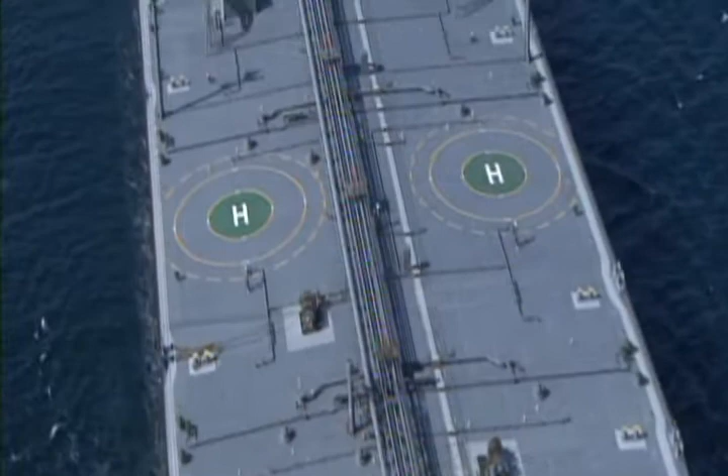Especially for a large ship, it is customary to have a pilot guided into and out of a port. But to ensure the ship's safe navigation at port, the ship's captain must visualize in advance how to steer the ship and be ready to compare it with the pilot's performance in his mind's eye.

For safe navigation, the officer at the helm needs to have a clear understanding of external forces and surrounding conditions in order to berth and unberth the ship through cooperation with the tugboat operator. This requires the steering officer to be familiar with the performance, characteristics, and operation of tugboats.

This DVD is intended for captains and deck officers whose duties include maneuvering of a ship, to better understand not only the performance characteristics of tugboats, but also the correct use as an indispensable aid in berthing or unberthing of vessels.

Tugboats are classified by their usage. Harbor tugs are intended to assist a large ship to enter and exit the port. Towing tugs tow work vessels and other non-self-propelled ships, and salvage tugs relieve ships in distress. This DVD focuses on harbor tugs.

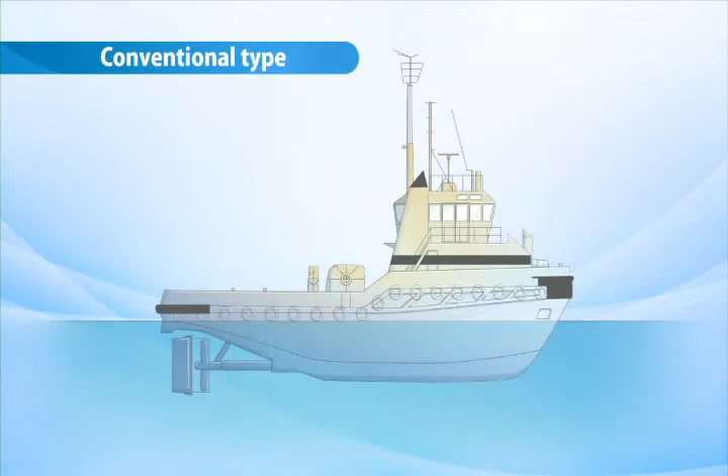The propeller of a tugboat differs in type with its position of installation. A tugboat with its propeller toward the stern, like an ordinary merchant ship, has a number of different propellers available, including the conventional type propeller and a flap type rudder, a combined type with a conventional propeller and an added bow thruster, an azimuth stern drive (ASD type) using a Kort nozzle type propeller with no rudder, and a pump jet type.

On the other hand, a tugboat whose propeller is installed toward the bow is known as a tractor tug, which usually has a Voith-Schneider propeller or an azimuth propeller.

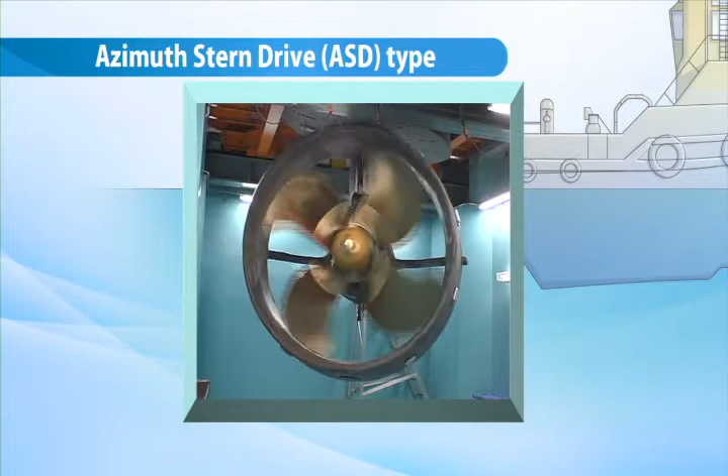The ASD-type propeller consists of a screw propeller and a surrounding Kort nozzle, which enables the propeller to be turned in a full 360-degree range. Its distinct advantages from the conventional propeller include the ability to generate a strong thrust in any direction, forward, astern, left or right, and reducing the tugboat's overall length.

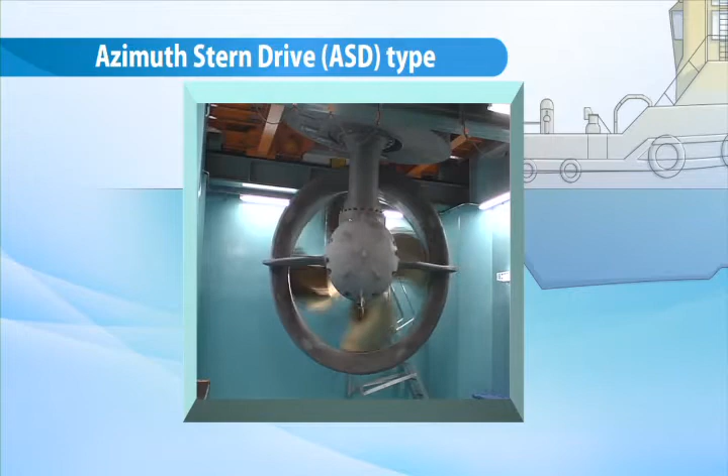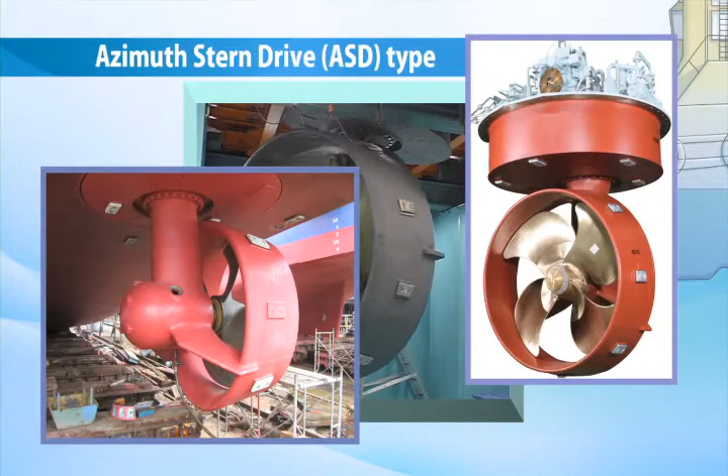The ASD type are manufactured under different names, such as Duckpeller, Z-peller, or Rex-peller, but they do not significantly differ in working principle. In Japan, the ASD type propellers constitute the mainstream.

The pump jet type propulsion system has a pump fitted to the hull bottom that spurts out seawater obliquely downward as a force to drive the boat ahead. By varying the spurt direction, the boat can be propelled in any direction in a 360-degree range.

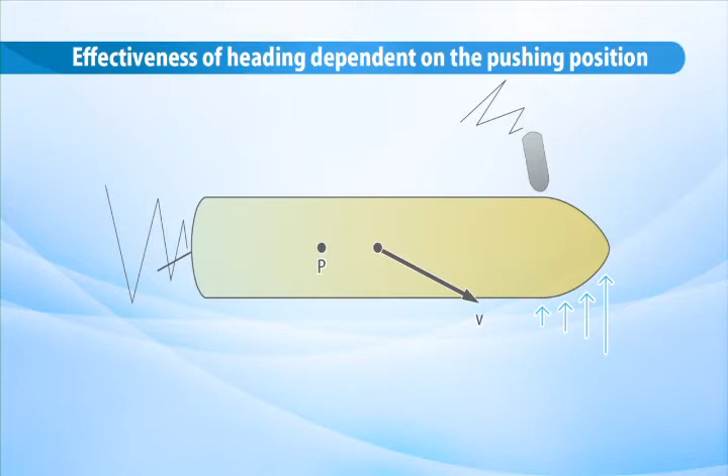Hull movements can be considered in 2 separate aspects: force and turning moment. The following focuses on wind-induced hull movements. First, let us suppose that the wind is blowing in the direction of 45 degrees on the starboard of your ship. Wind pressure works on the ship's center of wind pressure.

The wind pressures can be broken down into 3 elements, including the wind pressure in the longitudinal direction, wind pressure in the transverse direction, and wind pressure moment.

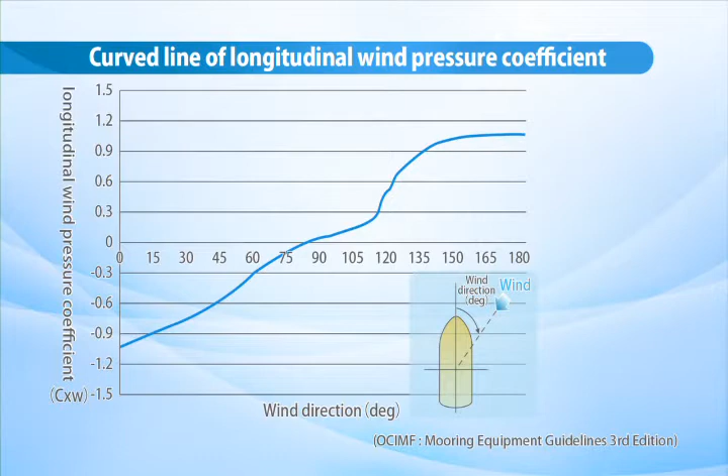On a graph of the longitudinal wind pressure coefficient, in which the horizontal axis represents the wind direction and the vertical axis represents the coefficient, it is negative at 45 degrees of wind direction. This means moving back. On a graph of the transverse wind pressure coefficient, it is negative at 45 degrees of wind direction. This means being driven in the port direction.

On a graph of the wind pressure moment, in which the horizontal axis represents the wind direction and the vertical axis represents the coefficient, it is positive at 45 degrees of wind direction. This means the generation of a clockwise moment. Overall, the ship turns clockwise while being driven obliquely port astern.

Next, let us suppose that the wind is blowing in the direction of 90 degrees on the starboard of your ship, with the wind pressures in the longitudinal and transverse directions, and wind pressure moment same as before. A graph of the longitudinal wind pressure coefficient shows a slight positive value at 90 degrees of wind direction. This means slightly moving ahead.

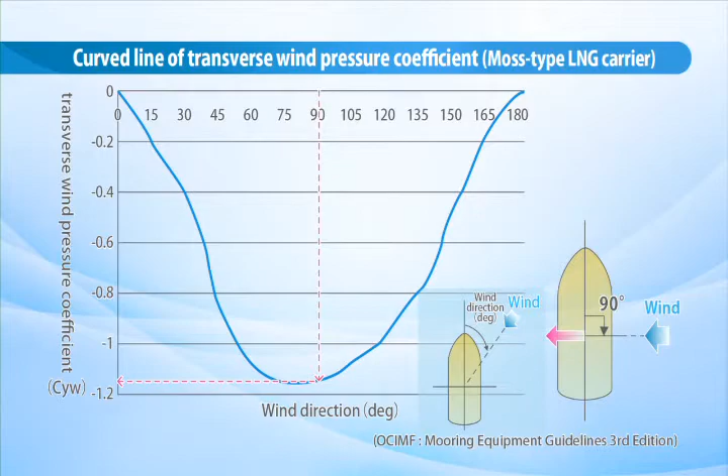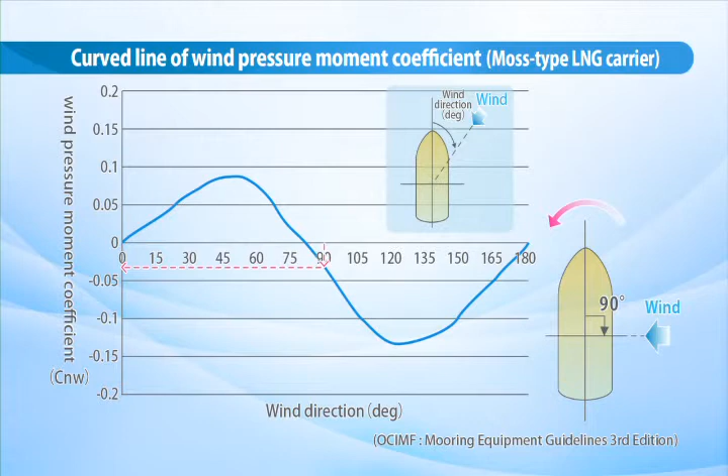A graph of the transverse wind pressure coefficient shows a negative value at 90 degrees of wind direction. This means being driven in the port direction. A graph of the wind pressure moment shows a negative value at 90 degrees of wind direction. This means the generation of a counterclockwise moment. Overall, the ship turns counterclockwise while being driven obliquely port ahead.

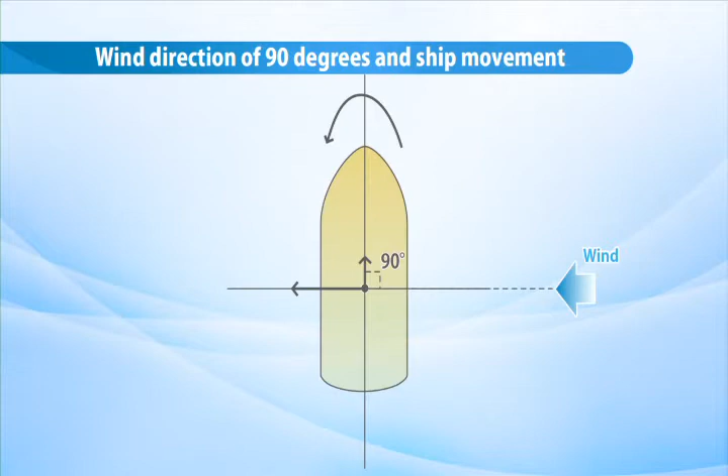Now let us suppose that a Moss-type LNG carrier, 300 meters between perpendiculars, at halt is to be pressed sideways by four 4,000 horsepower tugboats. What will be the dynamic motions at work?

For an ASD-type tugboat, the bollard pull is calculated to be 1.5 tons per 100 horsepower, which at 4,000 horsepower equals 60 tons. If 80% of this 60 tons can be used as thrust, the full thrust per boat will be roughly 48 tons.

In a first case, let us suppose that a wind of 12 meters per second is blowing at the ship head-on, namely a relative wind direction of 0 degrees.

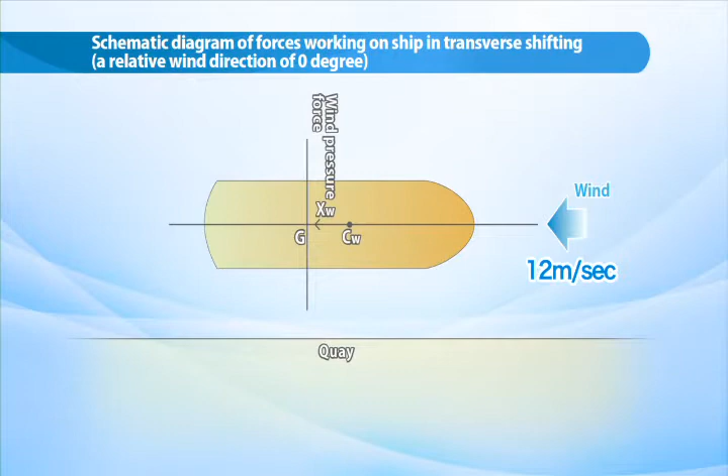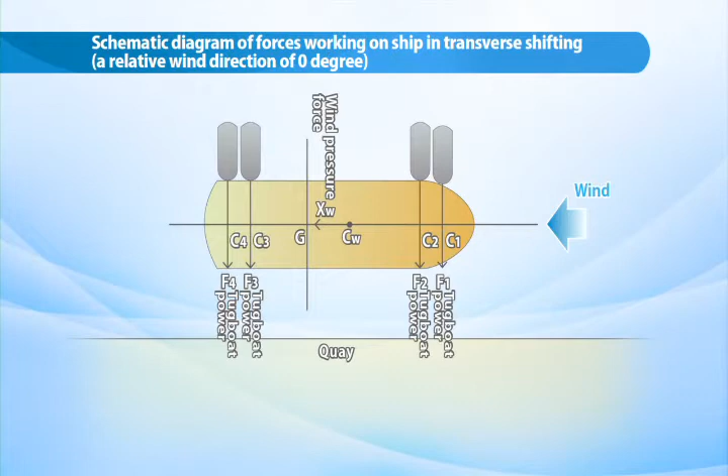Regarding the ship's movement, both the wind pressure force and the pushing force of the tugboats should be taken into account. Usually, when the wind blows head-on, the wind force only works astern, but neither a transverse force nor a turning moment is generated.

The magnitude of the wind pressure force differs with the ship's shape and area exposed to wind. Here, supposing the longitudinal wind pressure coefficient is minus 1.02 and the area of exposure to headwinds is 2,000 square meters, the longitudinal wind pressure is calculated to be about 18 tons.

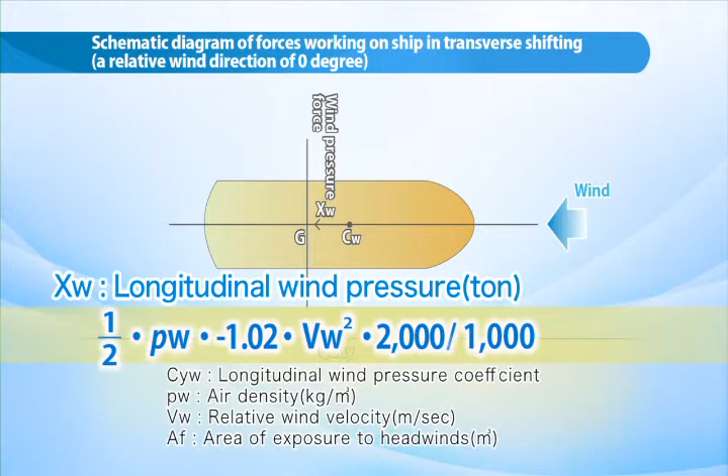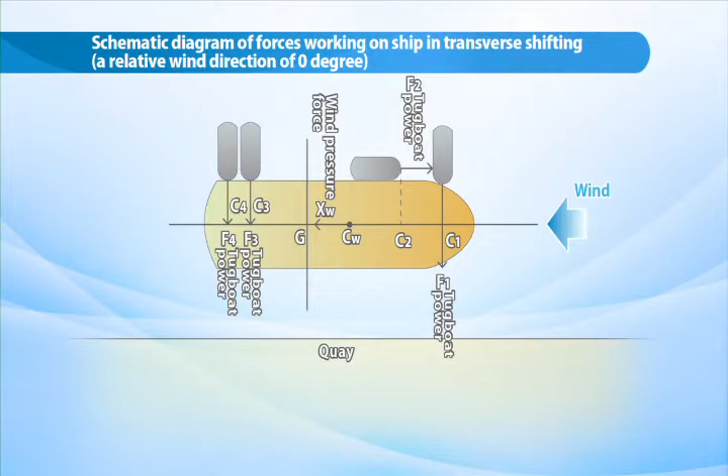In order to move the ship exactly sideways from the start point of pushing, the tugboat's thrust should cancel the wind pressure force. The wind pressure force in the longitudinal direction is canceled by placing one of the tugboats for alongside towing or towing on a line at the bow, and having it run at slow speed ahead in the 12 o'clock direction. The ship can then be shifted transversely while adjusting the thrusts of the other tugboats.

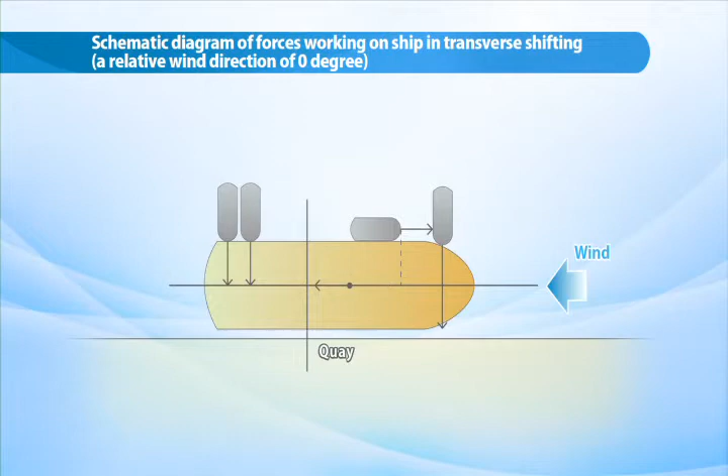In a second case, suppose the wind is blowing directly sideways against starboard at 12 meters per second in a relative direction of 90 degrees.

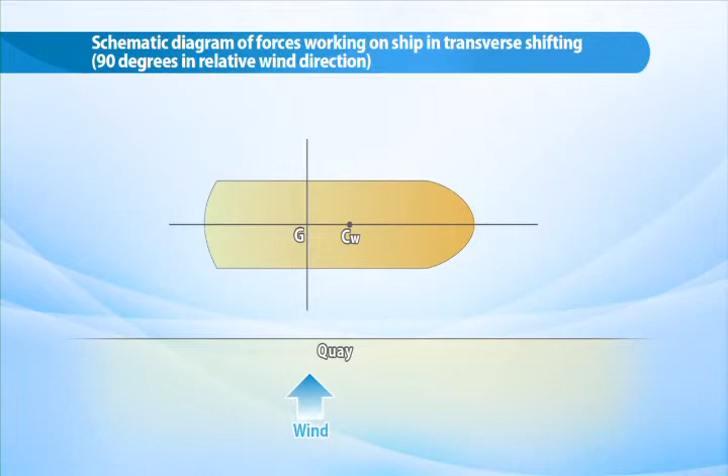Same as before, both the wind pressure force and the pushing forces of the tugboats should be taken into consideration. Usually, when the wind blows directly sideways, there are forces working ahead and transversely, causing a counterclockwise moment.

Here, let us suppose that the longitudinal wind pressure coefficient is minus 0.02, the transverse wind pressure coefficient is minus 1.16, the wind pressure moment coefficient is minus 0.028, the area of exposure to headwinds is 2,000 square meters, and the area of exposure to sideway winds is 9,000 square meters.

That would mean the forces working on the ship include a wind pressure in the longitudinal direction of about 0.4 ton on the bow, a wind pressure in the transverse direction of about 93 tons on the port side, and a turning moment of about 675 ton-meters counterclockwise.

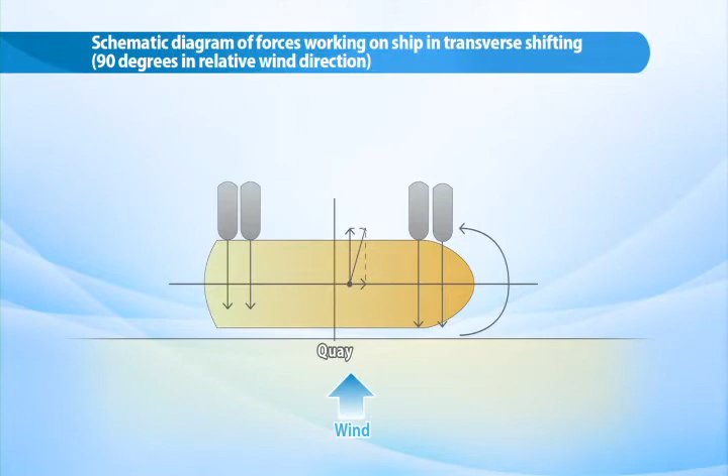In order for the ship to shift from the start point of pushing in the exact transverse direction, the thrust of the tugboats should cancel the wind pressure force in the longitudinal direction and the turning moment. Furthermore, the pushing should be accomplished with a greater thrust than the wind pressure force in the transverse direction.

It should be noted, however, that the wind pressure force in the longitudinal direction in this example is only 0.4 ton, which is too small for serious consideration.

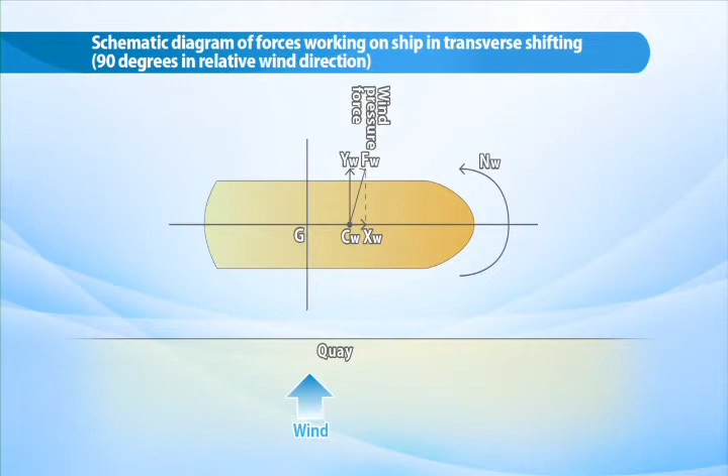On the other hand, in order to cancel the turning moment, it is necessary for the tugboats toward the bow to have a greater thrust than the tugboats astern.

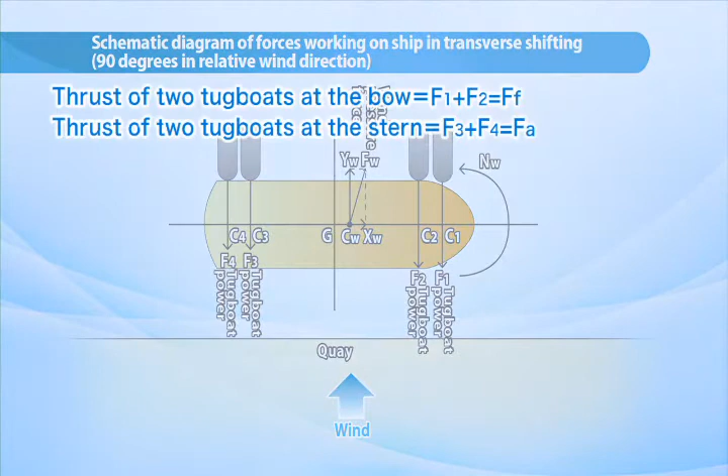For instance, if two tugboats each are to push the ship in the full 3 o'clock direction, head-on, 100 meters ahead of and 100 meters behind the center of gravity respectively, the combined thrust of the tugboats ahead should be about 7 tons greater than that of the tugboats astern.

The combined thrust of the 4 tugboats in this case is about 192 tons, greater than the approximately 93 tons of the transverse wind pressure, and therefore transverse shifting is possible.

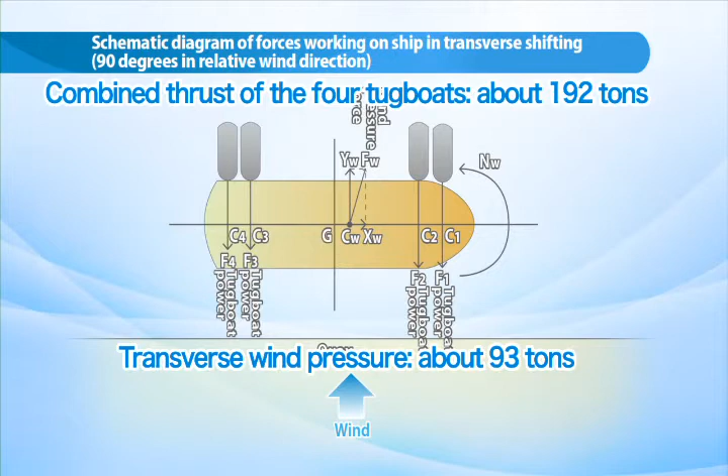Usually, when the ship is to be shifted transversely, an imbalance between the force of the tugboats ahead of the center of gravity and that of the tugboats behind would invite a turning moment, and accordingly, the power outputs of the tugboats should be adjusted appropriately.

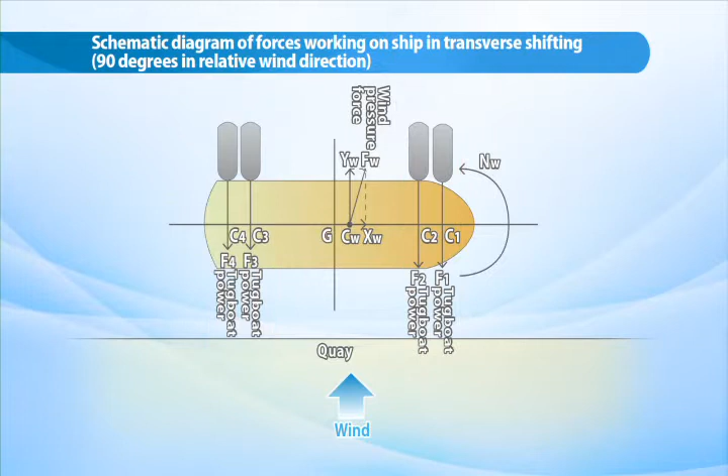Regarding the turning of the supported ship, both the wind pressure force and the pushing forces of the tugboats should be considered as in the case of transverse shifting. Yet, unlike in transverse shifting, the change in relative wind direction with the ship's turning also deserves attention.

If there is no other external force at work, the angular speed of turning is smaller in the early phase of turning and increases as turning progresses. Therefore, the ship is exposed to winds in the same direction for a long period of time in the early phase of turning.

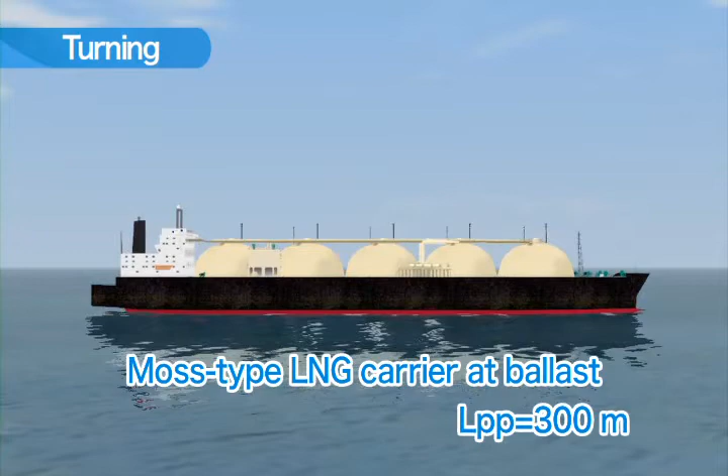Let us suppose that a Moss-type LNG carrier at halt in ballast is to be turned 180 degrees starboard by 4 4,000 horsepower tugboats. The vessel measures 2,000 square meters in area of exposure to headwinds, 9,000 square meters in area of exposure to sideway winds, and 300 meters in length between perpendiculars.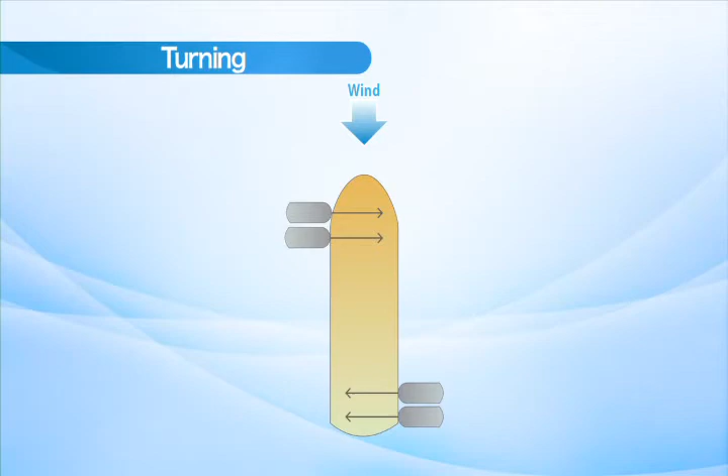Shown here is a case in which the ship is turned 180 degrees by having 2 of the tugboats push the port side of its bow in the 3 o'clock direction, and the other 2 push the starboard side of the stern in the 9 o'clock direction, both at full power.

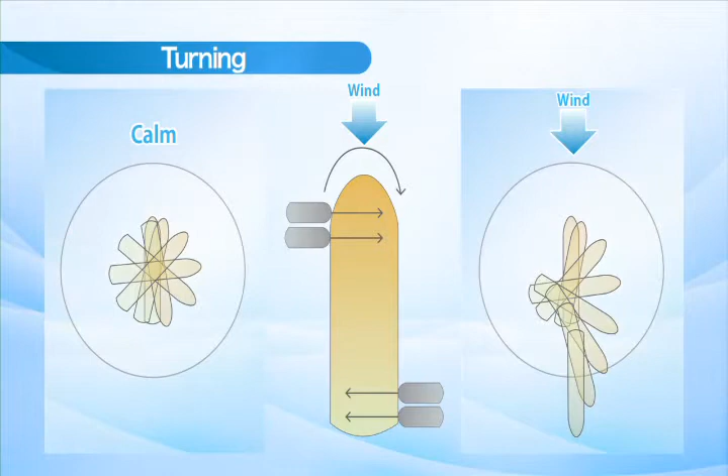The diagram to the left shows variations in wake when there is no wind, and to the right, wake variations when there is some wind. You can see that when there is no wind, there is substantially no shift ahead, astern, port, or starboard, and the turning takes place where the turn started.

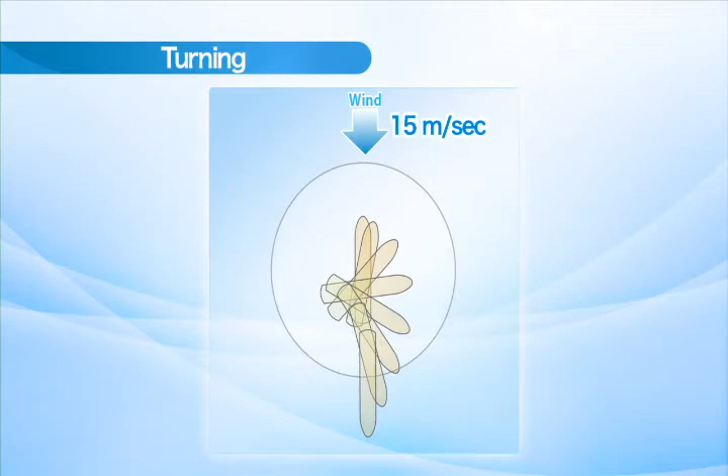Next, when there is some wind, say 15 meters per second, directly at the bow, or at 0 degree in relative wind direction, the ship's position after the turn is behind where it was before making the turn because it has been driven astern. To adjust the turning position using only tugboats, a thrust against the wind would be needed.

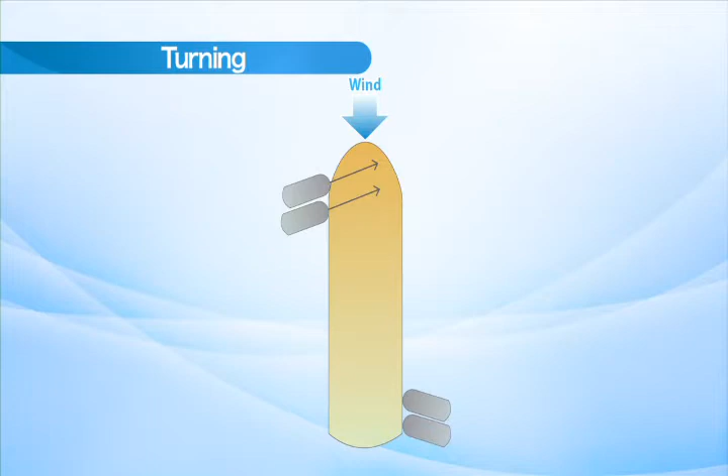One way to achieve this is to have the tugboats ahead push in the 2 o'clock direction, and those astern push in the 10 o'clock direction, and maneuver the ship as if to have them push in the 3 and 9 o'clock positions respectively, with an increase in the turning angular speed.

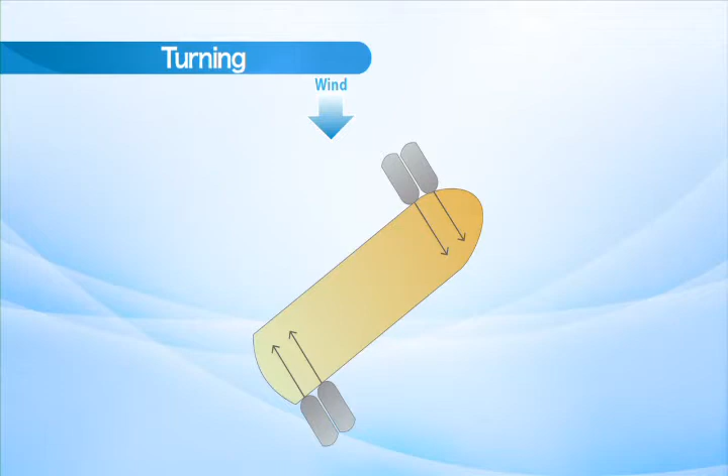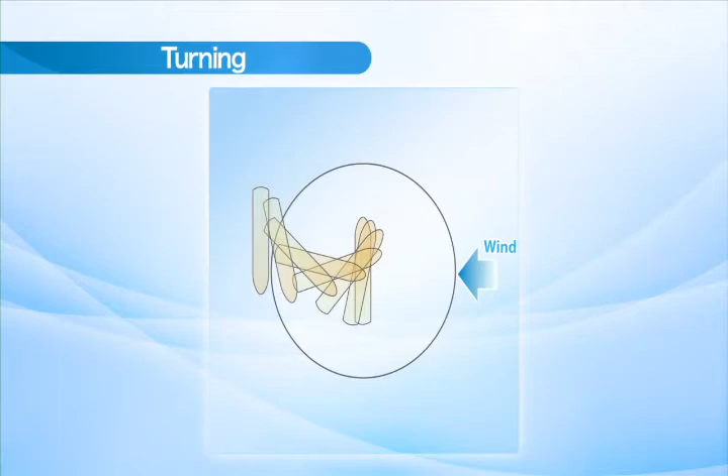You will see that the ship's position after the turn is farther on the port side than before, as the wind has driven the hull in that direction. Adjusting the turning position using only tugboats would require a thrust in the starboard direction.

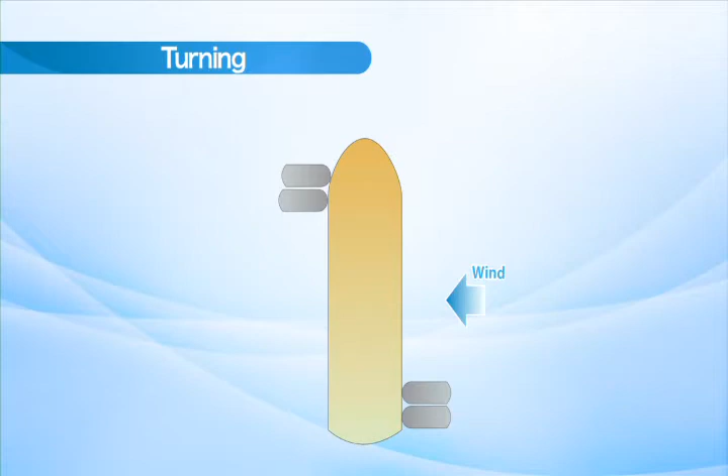In the early phase of turning, the stern would be pushed in the same direction as the wind, but the bow would have to be pushed against the wind. In one example of spinning, 2 tugboats at the bow are used at full speed, and the other 2 at the stern at slow speed.

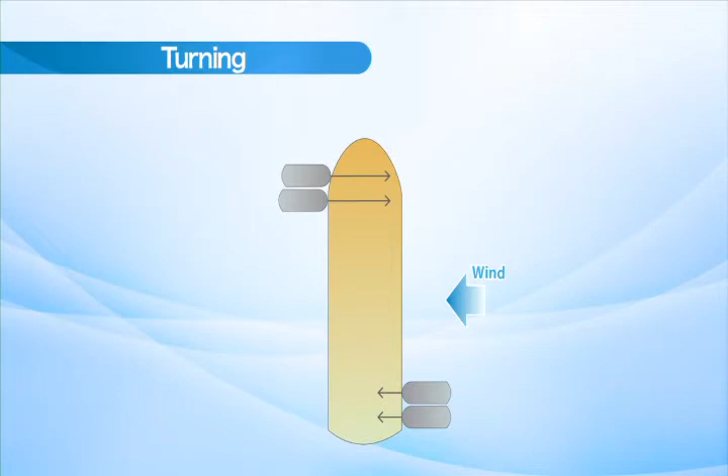Therefore, it is imperative to take into account topographical features of the surroundings as well as environmental conditions, and deploy the tugboats appropriately for these external factors.

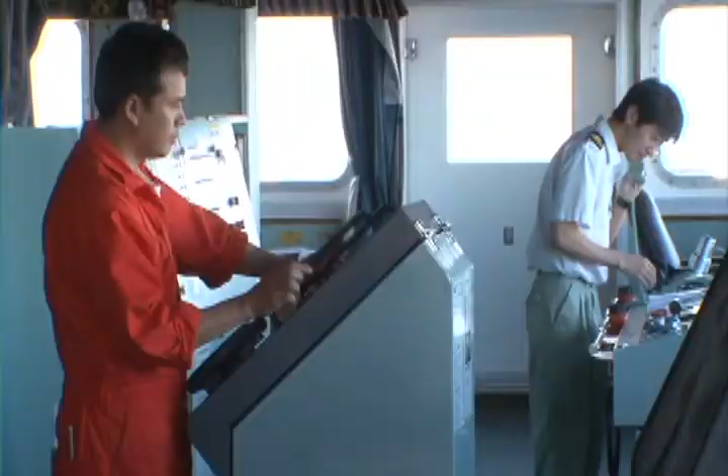When the ship nears the port of call, the captain considers the port situation and the day's weather and decides how many tugboats will be needed. If the local association of pilots and/or the berth have their own tugboat requirements, the captain will also take these into account. If the ship has visited the port in the past, there should be no problem.

But if it's its first call at the port, sufficient information to make a decision may not be available, and the captain will have to make a difficult choice. In view of this problem, this DVD will introduce the concept of tugboat power allowance.

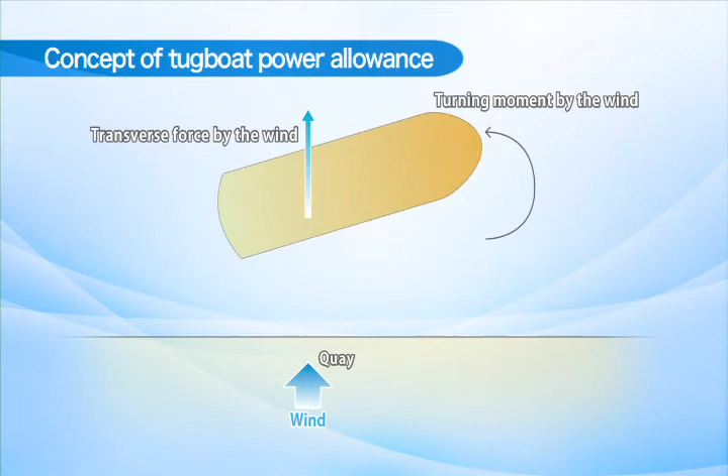When the ship is to be berthed against offshore wind, pushing the ship by tugboats sideways involves two types of relevant forces: one to control turning by the wind, and the other purely required for transverse shifting. The force available for transverse shifting can be considered the balance of subtracting the force to control turning by the wind from the combined thrust of all the tugboats.

The Tugboat Power Allowance indicates how much greater the force of tugboats available for transverse shifting is than the wind pressure force. It varies with the ship's load condition, the power output, number, and arranged position of the tugboats, and the wind direction and velocity.

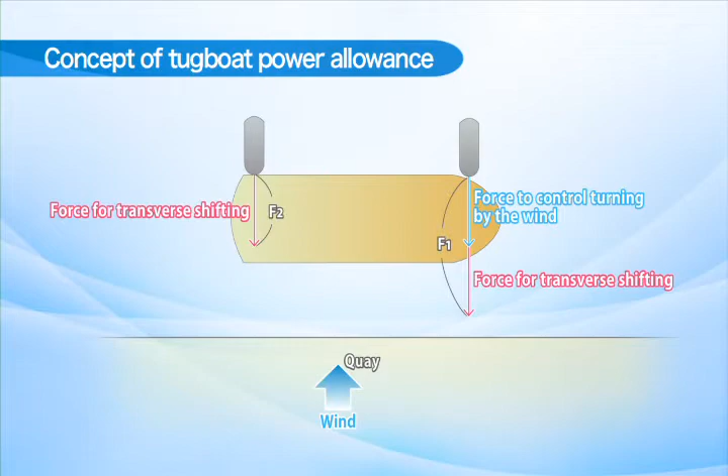In reality, the arranged positions of tugboats to push or pull the ship at its bow and stern are substantially unchanged. Therefore, if you prepare a graph in advance for each of the relevant factors, including the ship's loaded condition, the thrust and number of the tugboats, and the wind direction and velocity, you can keep reference drawings available to always use aboard the ship.

Now let us look at the steps in preparing the graph. For our example, one tugboat each is assigned to the bow and stern to help the ship berth against offshore wind.

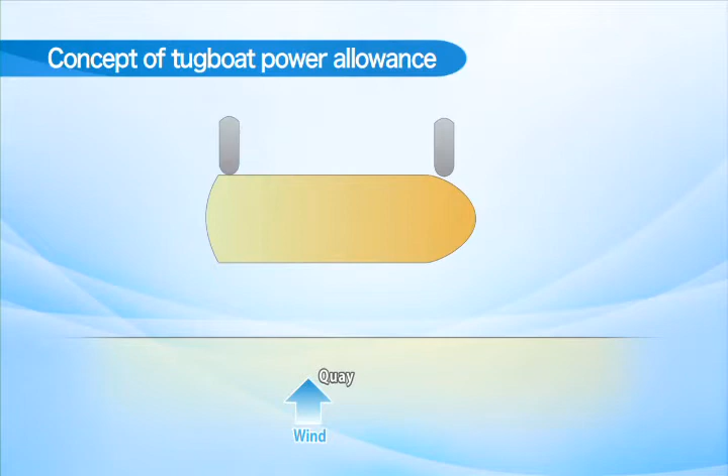1. Obtain data on the ship's wind pressure coefficient and area of exposure to sideway winds. 2. Calculate the turning moment and the transverse wind pressure force. Calculation formulas will be provided at the end for your supplementary reference.

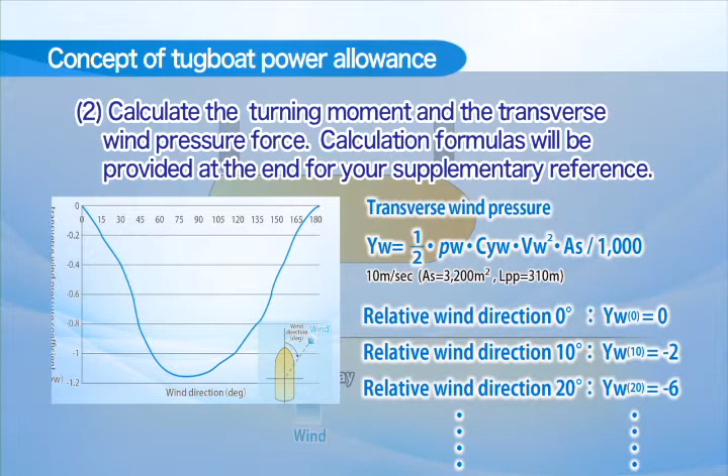Check with blueprints, including the general arrangement, to find out the distances from the center of gravity to the supposed working points of the tugboats.

Check the power output and bollard pull of each tugboat. If no such information is available, make them 100 horsepower and 1.5 tons respectively. Accounting for the influence of waves, use 80% towing power for your calculation.

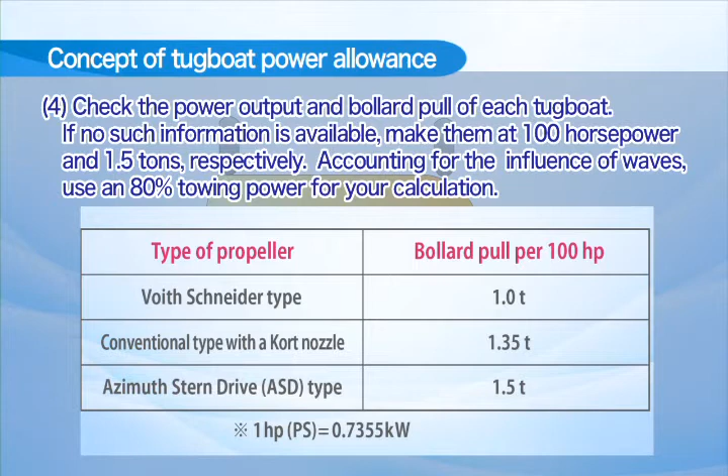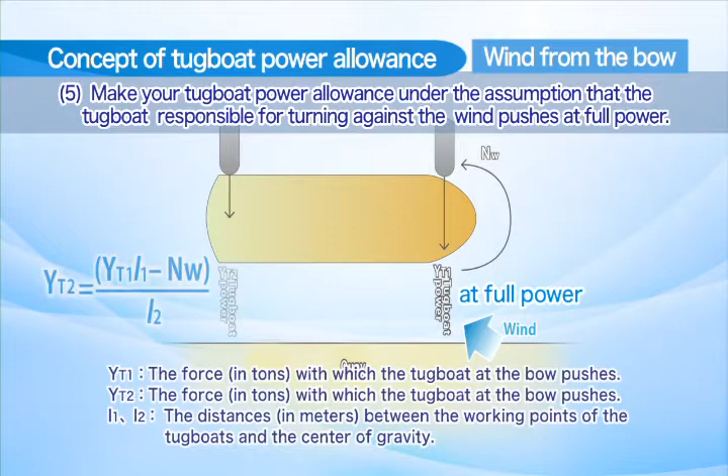Make your tugboat power allowance under the assumption that the tugboat responsible for turning against the wind pushes at full power. Or, when the tugboat at the bow cancels the wind pressure moment, the relationship between the force YT1, with which this tugboat pushes at full power, and the force YT2, with which the tugboat at the stern pushes for transverse shifting in parallel, is YT2 equals YT1 times L1 minus NW divided by L2.

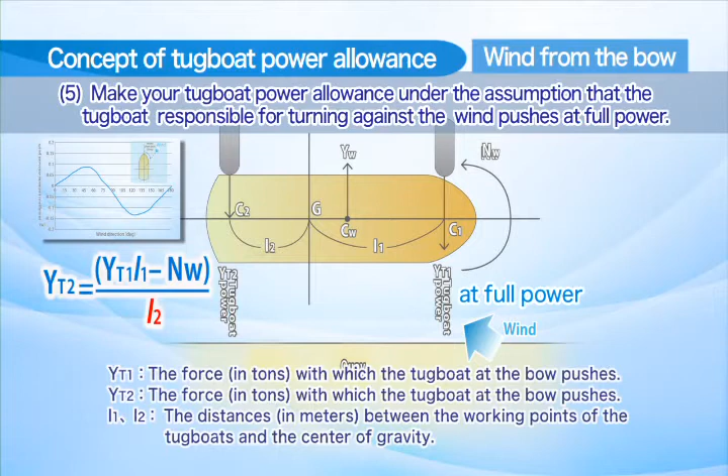The force available for use in transverse shifting is represented by Y F/T equals YT1 plus YT2. By dividing the force available for use in transverse shifting by the exact sideway wind pressure force, the tugboat power allowance can be calculated: Tm equals Y F/T divided by YW.

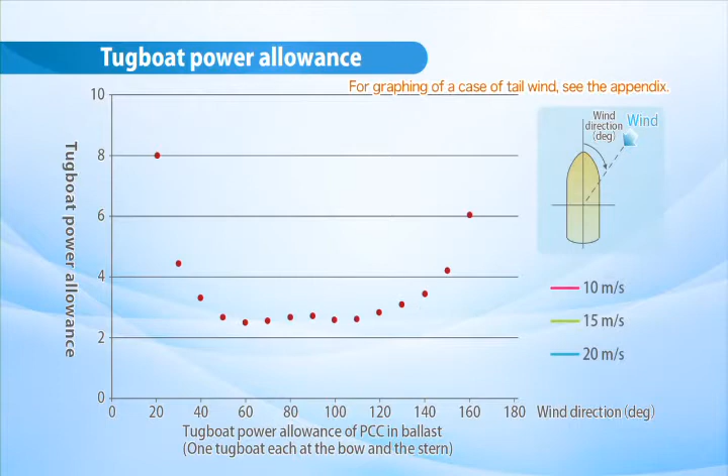As the tugboat power allowance can be calculated in this way, if you calculate the allowances at intervals such as every 10 degrees of relative wind direction and every 5 meters per second of wind velocity, and make a graph with the data, you can readily determine the minimum number of tugboats needed under given conditions.

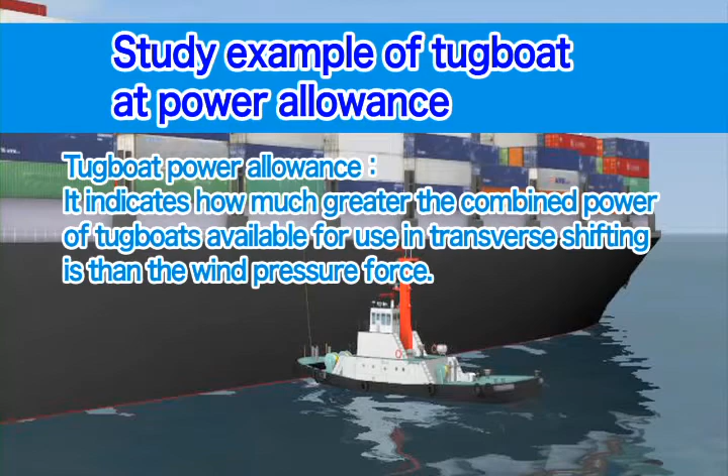The tugboat power allowance indicates how much greater the combined power of tugboats available for use in transverse shifting is than the wind pressure force.

However, experience tells us that the recommended tugboat power allowance should be 3 to 4.

For a basic maneuvering pattern using tugboats, there is no significant difference between large and small ships. If requirements in the number of tugboats and their total power output are adequate, safe maneuvering can be accomplished.

It is essential to keep in mind that external forces always vary, and therefore to secure more than enough tugboats to ensure safe maneuvering.

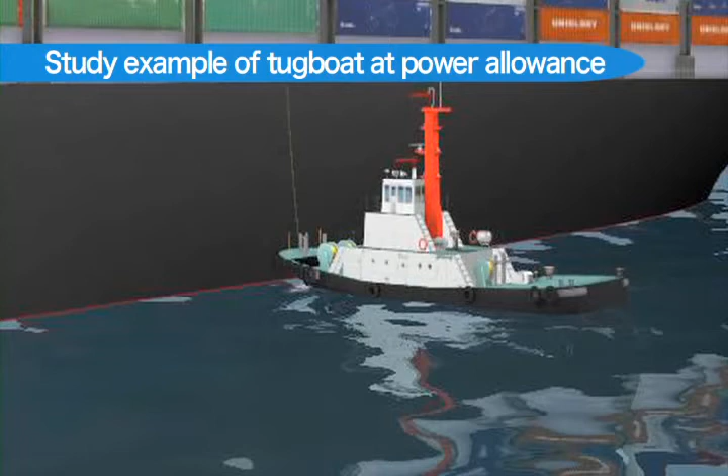Let's consider a fully loaded VLCC, for example. It is 310 meters long between perpendiculars and has a 1,100 square meter area of exposure to headwinds, and a 3,200 square meter area of exposure to sideway winds.

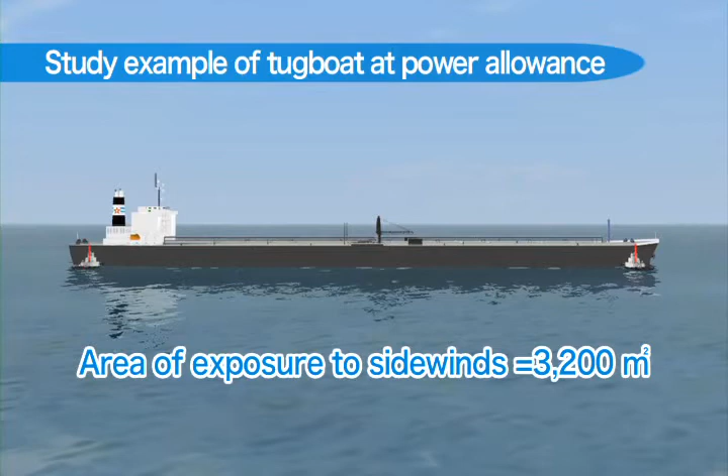The distance between the tugboat and the ship's hull center, both on the bow side and on the stern side, is 150 meters, while the tugboat's bollard pull is 48 tons.

In the graph, the horizontal axis represents the relative wind direction as seen from the bow. The vertical axis represents the tugboat power allowance, indicated by the red line when wind velocity is 10 meters per second, the green line at 15 meters per second, and the blue line at 20 meters per second.

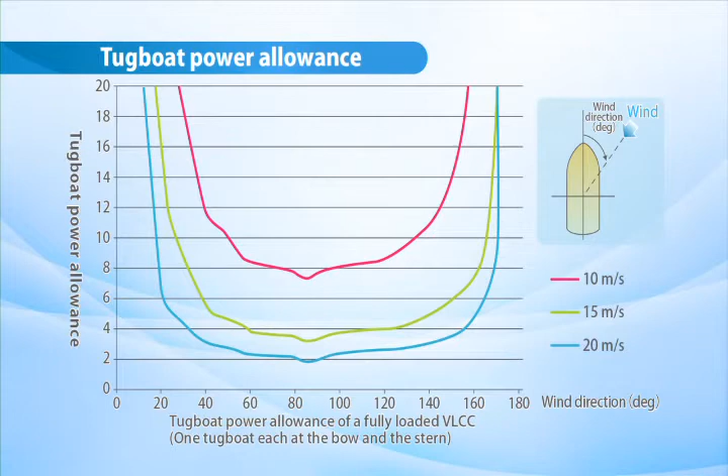To use the graph, with a recommended tugboat power allowance of 4, draw a horizontal line at that number. The number of tugboats indicated in the area above this horizontal line would be sufficient.

For instance, if a 10 meter per second wind is blowing from a relative wind direction of 60 degrees, 2 tugboats would be sufficient because the tugboat power allowance represented by the red line is above this horizontal line.

However, if the wind velocity rises to 15 meters per second with the wind direction unchanged, 2 tugboats would not be enough, because the green line shows an area below the horizontal line.

If there is a shortage of tugboats, successively check the pre-drawn graphs for 3 tugboats and 4 tugboats. If the relative wind direction is 60 degrees and the wind velocity is 15 meters per second, assign 1 tugboat to the bow and 2 to the stern. The tugboat capacity would then be sufficient.

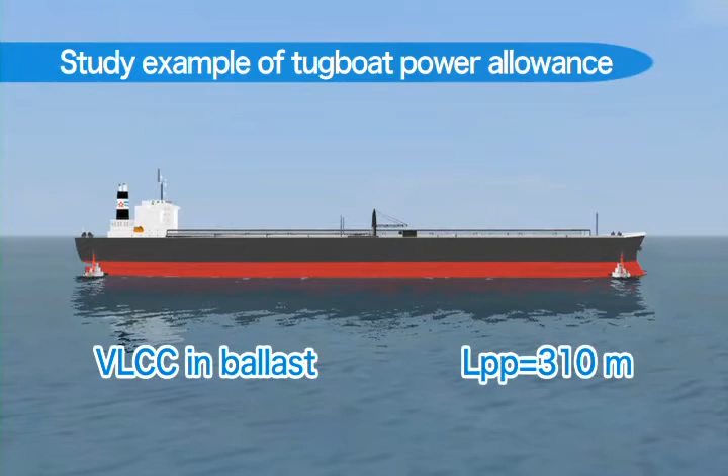Next, let us look at the same VLCC in ballast. It is 310 meters long between perpendiculars and has a 1,800 square meter area of exposure to headwinds, and a 7,100 square meter area of exposure to sideway winds.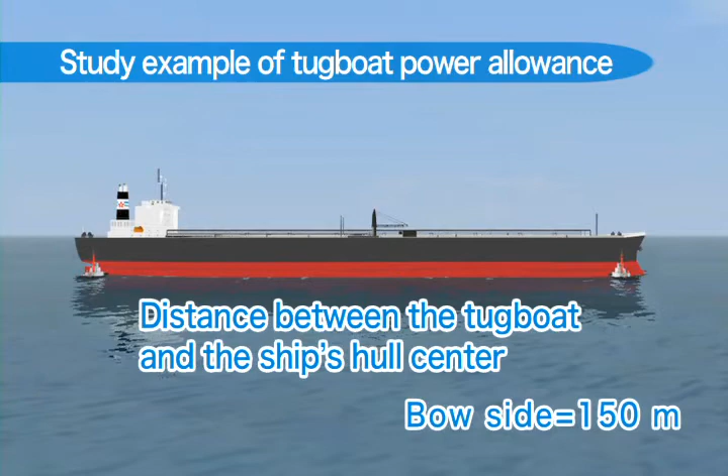The distance between the tugboat and the ship's hull center, both on the bow side and on the stern side, is 150 meters, and the tugboat's bollard pull is 48 tons.

If, for instance, a 10 meter per second wind is blowing in a relative wind direction of 60 degrees, 4 tugboats would be sufficient because the area is above the horizontal line.

However, if the wind velocity rises to 15 meters per second with the wind direction unchanged, there would arise a shortage of tugboats because the green line shows an area below the horizontal line. In this case, for instance, 3 tugboats at the bow and 2 at the stern would be sufficient.

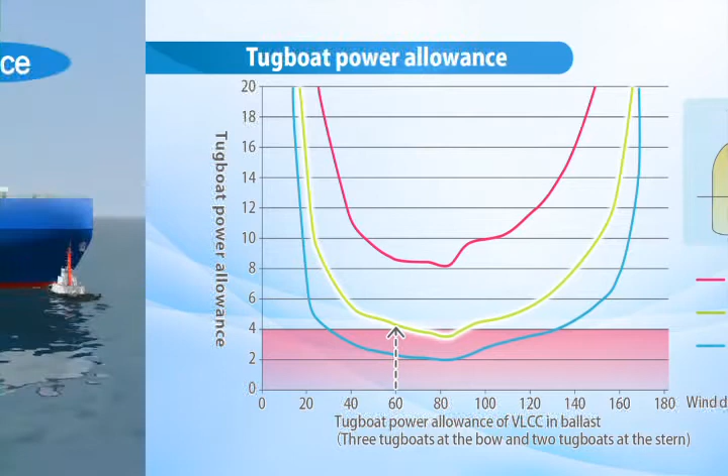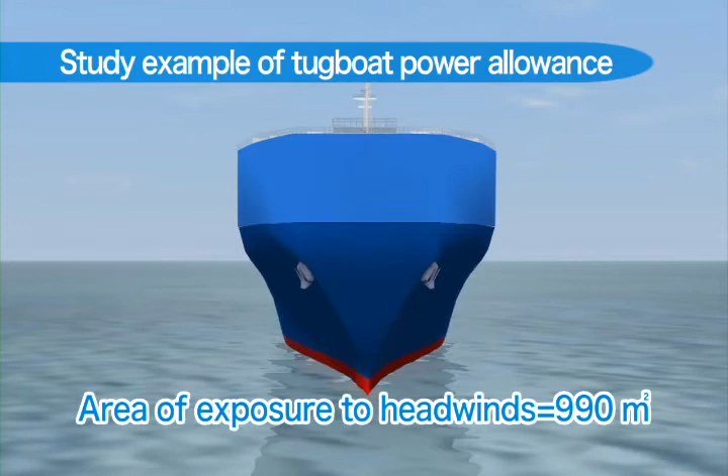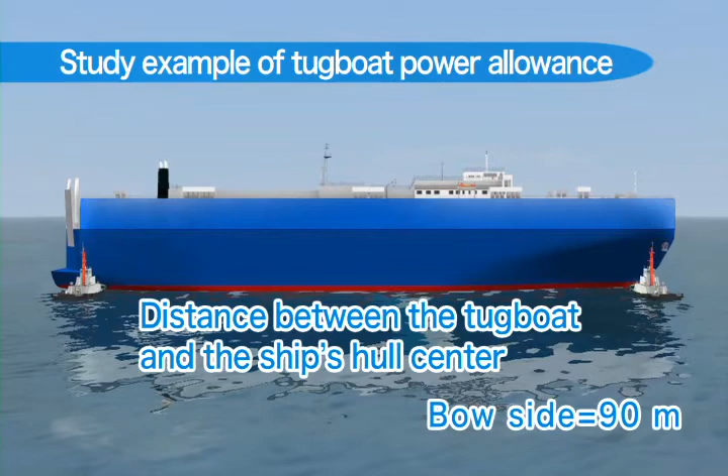Finally, let us look at a PCC in ballast, which has a large area exposed to wind forces. It is 190 meters long between perpendiculars and has a 990 square meter area of exposure to headwinds and a 5,750 square meter area exposure to sideway winds. The distance between the tugboat and the ship's hull center, both on the bow side and stern side, is 90 meters, and the tugboat's bollard pull is 48 tons.

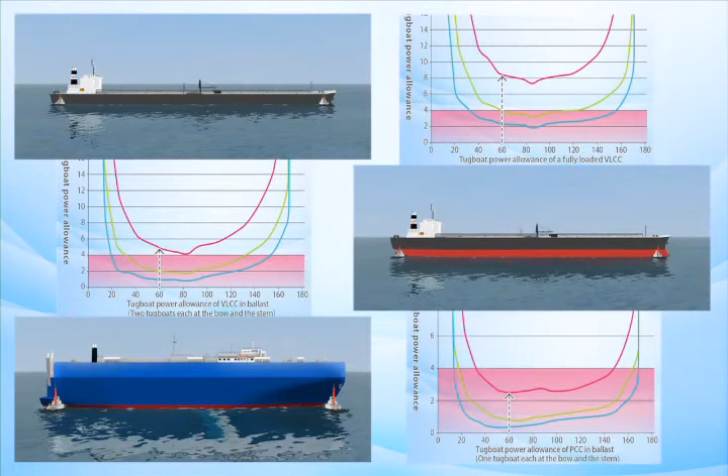For instance, if a 10 meter per second wind is blowing in a relative wind direction of 60 degrees, 2 tugboats would not be sufficient because the tugboat power allowance represented by the red line is below the horizontal line. So far, it has been explained how to use the graph of tugboat power allowance, but it should be noted that the tugboat power allowance does not take into account the influences of tidal currents and shallow water.

The previous section considered the tugboat power allowance only as it pertains to the influence of winds. Now let us look at how it is affected by tidal currents and water depth. When there is a current, the fluid pressure working on the ship increases with the exposed area under the waterline.

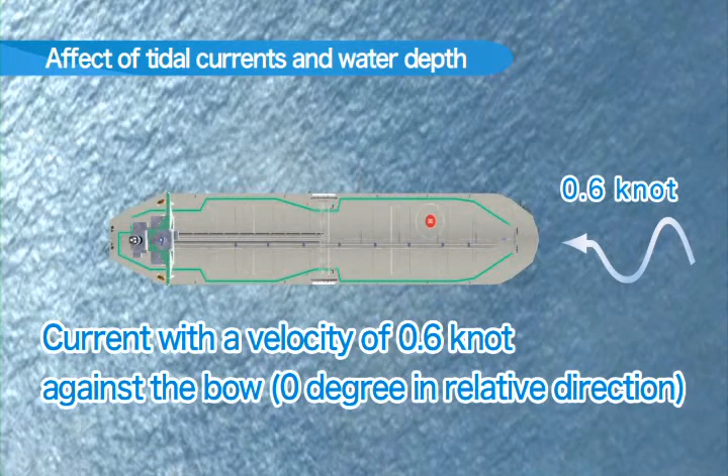Or if there is a current of 0.6 knot exactly sideways, 90 degrees in relative direction, and assuming a transverse fluid pressure coefficient of 1.6, the fluid pressure will be about 48 tons. As you can see, the hull shape is susceptible to the current in the transverse direction rather than at the fore and astern. In considering the required bollard pull, only transverse currents are taken into account to estimate the greatest possible effect.

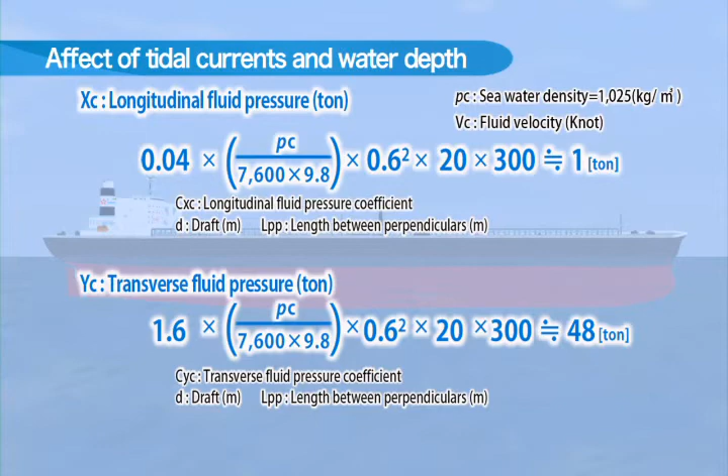The fluid pressure transverse force coefficient is what is applied to a loaded tanker based on a seawater density of 1,025 kilograms per cubic meter.

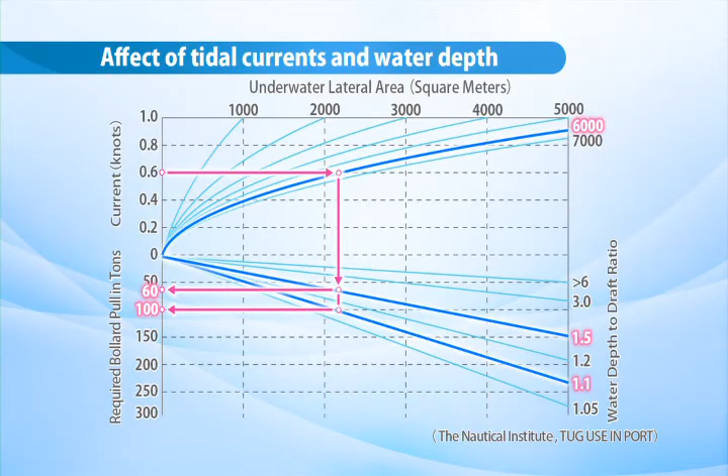So far, we have explained the dynamics involving the use of tugboats for maneuvering a large ship that includes such motions as transverse shifting and turning in the aspects of forces and moment. However, in actual maneuvering, it is imperative the officer at the helm recognizes these actions as sequences and thinks about the next action to take in performing steering duties.

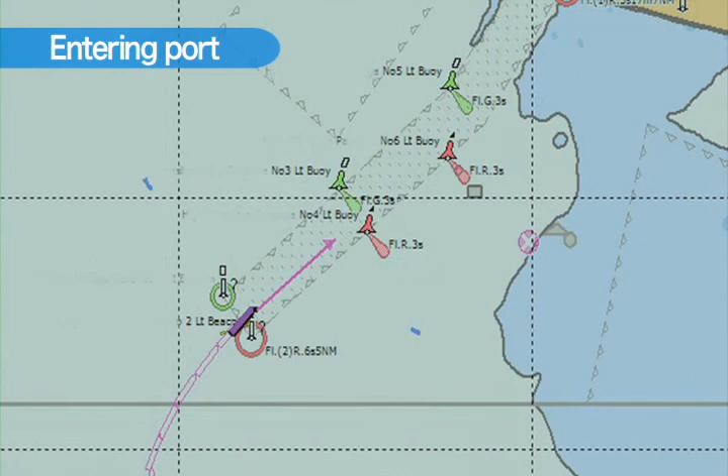Now let us see how maneuvering with the aid of tugboats is actually done. In our example, a large 260-meter class PCC enters port. First, we will outline the maneuver required to bring this vessel into port. The ship, having engaged tugboats near buoys number 1 and number 2 near the fairway entrance, and using both its main engine and the tugboats, approaches the berth while slowing down.

As the turning basin is set in the circle position in the chart planned in advance, the ship is once brought to a halt within the circle. With the docking side at the starboard, the PCC uses the tugboats and its own bow thruster to turn left. Its main engine and the tugboats drive it astern, bringing it to a halt once off the quay along which it is to be docked.

Then, while the tugboats adjust the ship's transverse moving speed at no more than 10 centimeters per second, the PCC is slowly docked.

We have seen the flow of the maneuver, but let us review the process, this time in more detail along with general caution regarding each step.

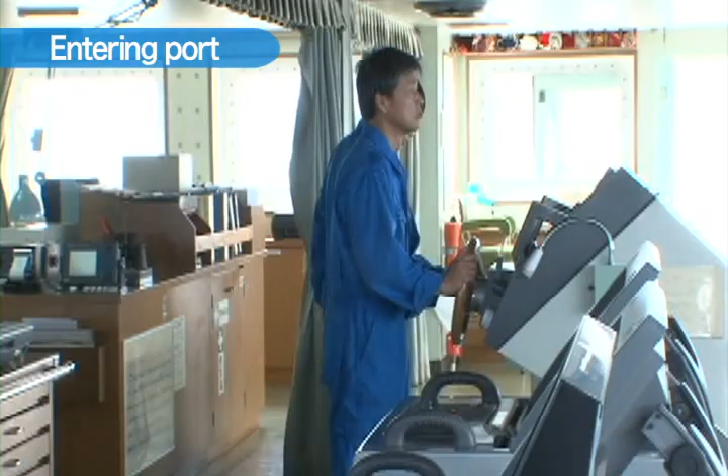In the approach phase, first the magnitude of external forces and the surrounding traffic are considered, and a decision is made on where to take up the tug lines, for instance, near buoy XX, and the tugboats are notified of this decision. On that occasion, the tugboats are also told of the positions on the supported ship to take the tug lines. In this case, a 3,500 horsepower...